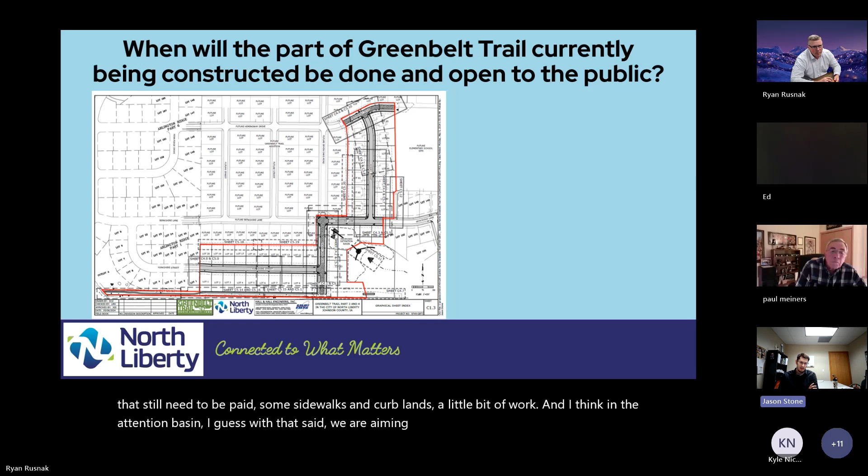Thanks for joining us, Jason Stone with Hall and Hall Engineers. As far as the addition currently under construction, the streets are all paved. There's a little bit of work left to do paving-wise - some trails still need to be paved, some sidewalks, some curb ramps, and a little bit of work in the detention basin. With that said, we are aiming for final acceptance in December. Weather pending, it may push off into January, and franchise utilities would follow shortly after that. So we're progressing, but weather is kind of holding us back a little bit.

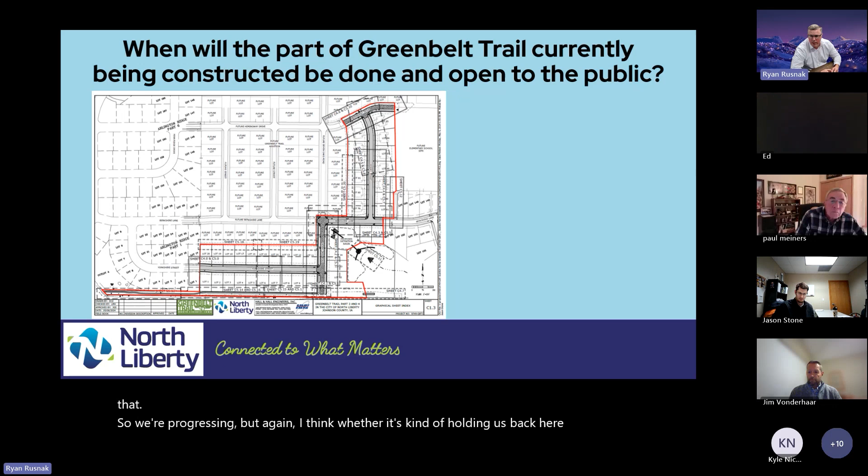And then I think people will probably be curious about that formal connection between the new section of Greenbelt and Arlington Ridge, with a little bit of a zigzag because of North Liberty Road. Okay, thank you for that.

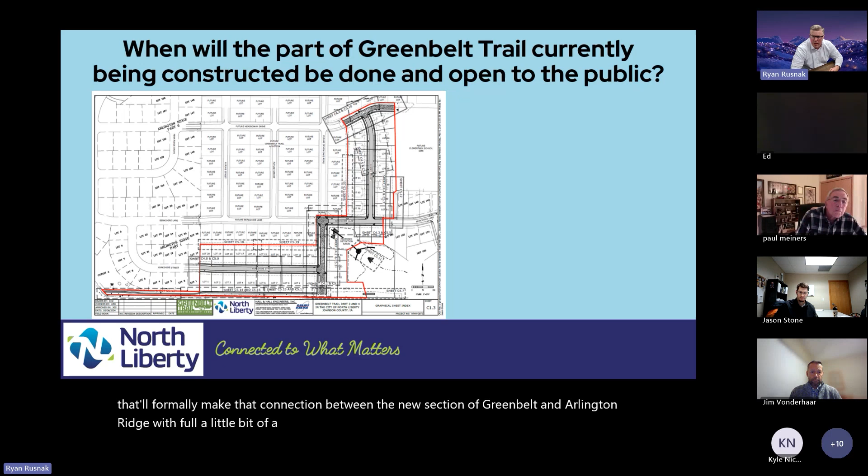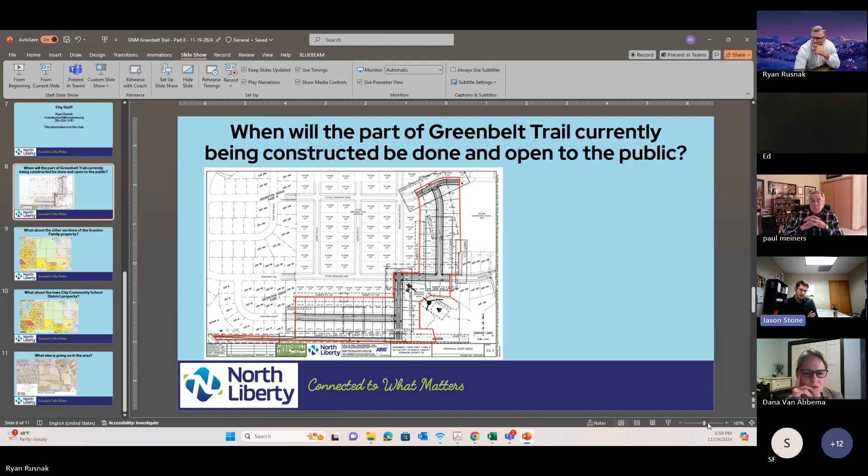I see the path that's coming into the neighborhood along the south end. They've just started digging that right off of Dubuque Street. How far into the neighborhood is that going to go? So there's a trail on the east side of Dubuque that's going to go from the very west end at Dubuque Street all the way to 7 Oaks. It'll go behind Arlington Ridge, behind the Greenbelt Trail, and then connect onto 7 Oaks, which runs north-south right through there.

Where on the map is the part that's already dug out there? Because I just walked through there the other day. This has got to be right here. Yep, you're right through there. So they're starting right there. Oh, I see. Okay.

As far as paving goes, obviously we're kind of fighting the weather a little bit, but I believe the intention is to start some of that paving yet this week. I'm not sure how far they'll get with it, but the intention is to try to get all of that trail done and accepted by the city yet this year.

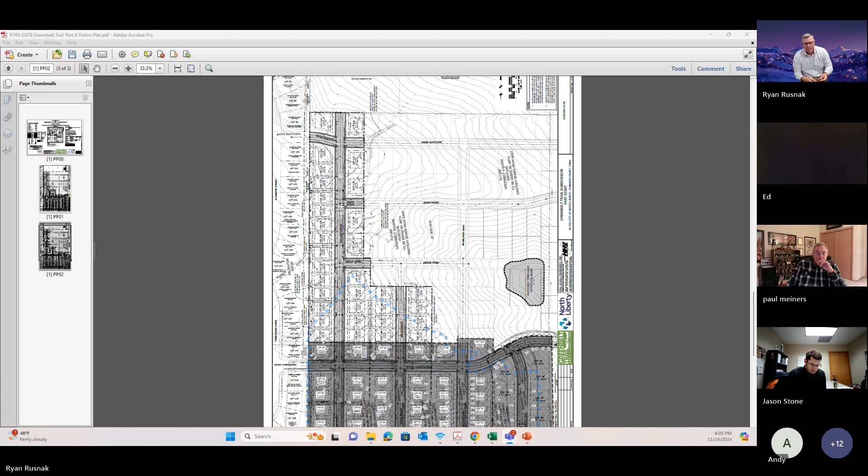So the new bike path that was connected to Dubuque Street, they put a new storm drain in that connects into the pond. What all is going to be feeding that? One, is that just the farm field coming into that to feed it? And two, they drained a lot of water out of it, and this time of year isn't the best time for fish with freezing over. So if it ices over, who's on the hook if we have a fish kill in the spring? Is that on them to restock?

So as far as that storm sewer goes, the drainage that connects into the pond will take on a very small area on the Greenbelt Trail property—there's a small swale. But for the most part it just takes on drainage from the field to the south. That area down at that corner is very flat, looks like water maybe just sits there. So we've sized things appropriately to get that drainage into the storm sewer and then into the pond. The pond was pumped down a little bit so they could get the storm sewer in. They have to put a flared end section to dump into that pond, and with that there's a little toe wall that goes underneath it. The reason they pumped it down a little was to allow that toe wall to get put in.

I believe it's all done. I'd have to check with a contractor, but I spoke with them a couple days ago, and it sounded like they were working on it at that time.

So is that something that, let's say there's a future development on the other side of Greenbelt, is that something they're going to tie into? We'd be taking more onto the pond because when we get heavy rains, just as now, it already goes up to the white fence when it gets high. I don't know if we're going to be taking more on in that area with future development of the other side of the sidewalk.